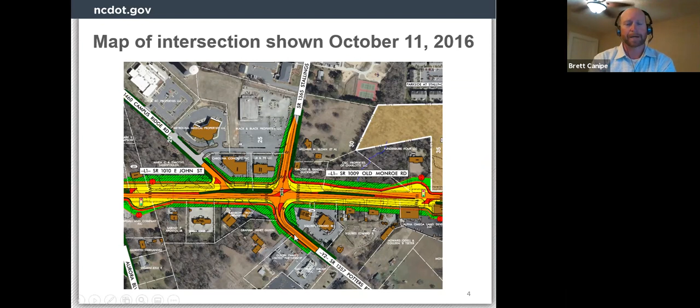This is a public hearing map, a depiction of what we originally proposed. This is the reduced conflict design. This is Potter Road that turns into Stallings Road, south to north on the screen, and west to east on Old Monroe Road in this direction. This design would allow left turns off of Old Monroe, but not left turns off of Stallings or Potter. The reason we'd do something like that is it increases the operational efficiency, and it's actually safer as well. However, we knew the town wasn't completely keen on that.

We've always been in this collaborative mode with the town, and we knew you wanted us to look at some other options. So we did. We looked at what it would look like to put a full movement, traditional intersection at Stallings Potter. That was at the town's request, but that was a good request, right? If it would work, why wouldn't we do that if that's what the town wanted? So we did take a look at that.

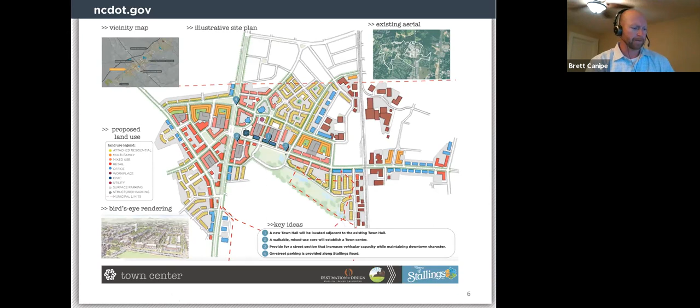We're aware the town has a desire to make this a downtown center, and part of that would include a multi-way boulevard feel with narrower lanes, landscape medians, and we could still talk about what we can do to beautify things out here even after this project's underway. This was a sketch the town provided depicting what this downtown center might look like, at a high planning level. We used this to come up with a few other options for us to think through.

We looked at that full movement intersection, and we've known this for quite some time and been pretty open about it. The full movement intersection doesn't give us the level of service we'd expect to deliver in that future year. We design projects to handle a future year of traffic, not today's traffic. That makes sense because it's a large investment of public funds, and we want to be good stewards of those funds. So operationally, we know the traditional intersection wouldn't work.

As an alternative, we looked at what's known as a quadrant roadway. The quadrant roadway could potentially work better to fit into this downtown center, because it influences the trips taken around the perimeter of an intersection. It doesn't seem as counterintuitive at first to some folks when they first look at it, although it'll take some getting used to. I'll show you a quick video that describes this better.

What we figured out was that the RCI, the original design shown on the public hearing map, actually worked the best. Just from a pure engineering perspective, level of service, we think the RCI was the best, but the quadrant performed okay—it was going to do the job. It wasn't quite as good, but it's somewhat splitting of hairs. We knew that one of those two designs is what it would take to handle that future year traffic volume.

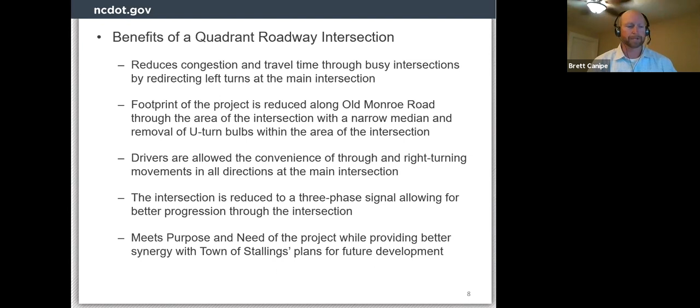Our thoughts are that this design we're going to go through here in a second is going to meet the purpose and need of the project, which we're bound to do, to serve the public. We believe it will match better with the town's future development. That's something Alex and I have talked about a number of times, just in general, the vision for the town. So it's a goal we share mutually, and we want to help the town achieve that if we can.

So these are just some quick definitions. Essentially, it's a way of redistributing the left turn by only making right turns. You would drive through an intersection, make a right, and you're going back the way you wanted to go, which would have been left if you turned left.

A lot of this information can be found if y'all are bored and want to do some quick research. There's certainly federal level guidance that tells us these types of intersections are the right choices to make in growing urbanized areas because of their functionality and their safety. So it's not a completely foreign concept.

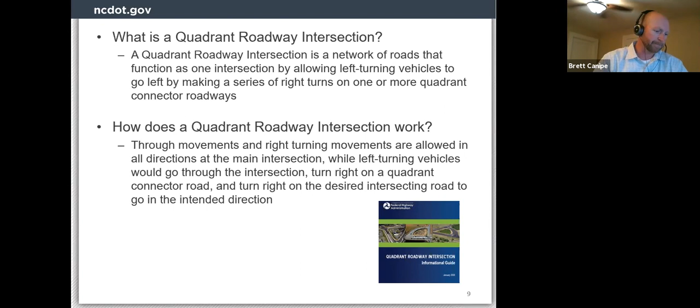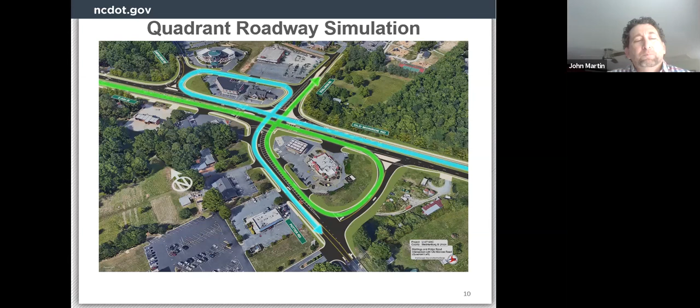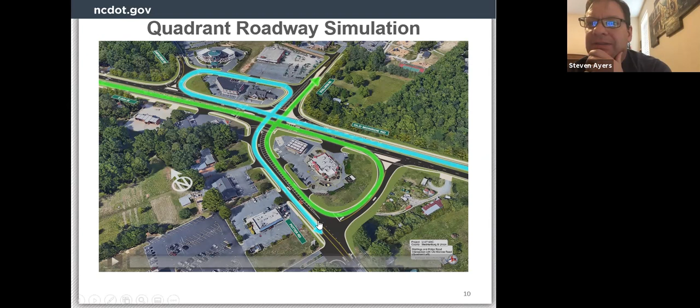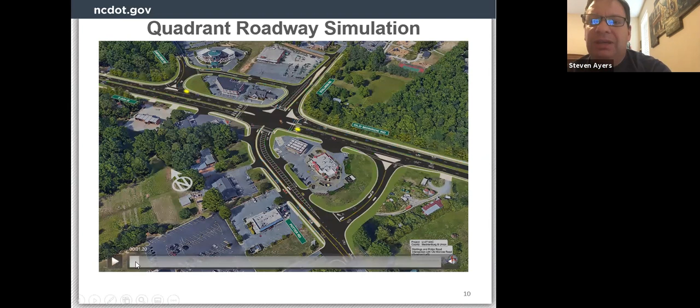I have one question on this one here, and it's still the same question I had the last time you came here. On the light blue side there's two lanes coming off of Potter Road. On the green side it's just a single lane going through the intersection. So my concern is, is there going to be any study to validate that you're not going to get traffic backing up there trying to turn right onto Monroe Road going towards Charlotte, with people trying to cut across those folks trying to get into the go-straight lane, across the lane for Potter. So you see what I'm trying to say?

Yeah. So the lane that you've got your cursor on right now that goes straight through, if it's backed up, then you're gonna have people starting to back up where your turn is coming in off the roundabout. And then also you're gonna have conflict, it seems like, of people trying to cross in front of them to get over into the turn lane.

And today, when it's rather busy, that straight through lane you currently have now easily backs up all the way past the park on the opposite side. So I guess I'm a little concerned, based on the traffic patterns I see currently, that would be a sticky point causing some grief with a lot of folks, because you'd have very little room there to basically crisscross traffic from one lane to the other.

Sure, and good questions. What I'll say to that is that the signal timing itself works in favor of the intersection.

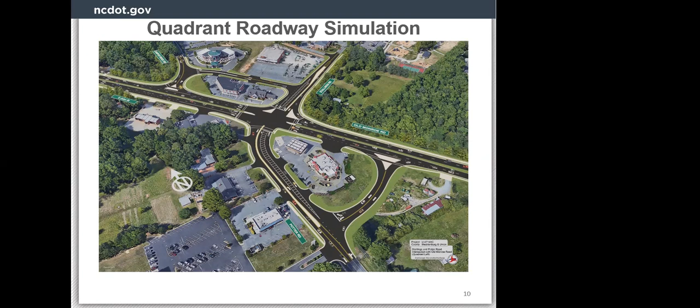I apologize, I didn't do introductions to the rest of the team, but that was Mike Reese. He is the Western Region Congestion Management Engineer for North Carolina DOT, and he is most definitely our expert when it comes to preparing for, designing, and coming up with these types of treatments. Thank you, Mike, for that detail.

I'm not sure where the 200 feet falls, but I'm assuming it's got to be up in there somewhere. The point is that queue of traffic today is much, much longer than 200 feet. So in the design year, we're stacking cars up 200 feet and then they're flushing, the intersection flushes through. That's the beauty of this design. It's just that much more efficient, which is exactly why we're proposing it.

And again, with the other benefits, the more narrow cross section, less cost, that's less lanes for pedestrians to cross. That alone is a big win for a place trying to become a downtown center, right? It's always a goal to reduce that pedestrian-vehicle conflict. So there's a lot of good attributes to this type of design. Thank you for that information, Mike, and thanks for answering the question.

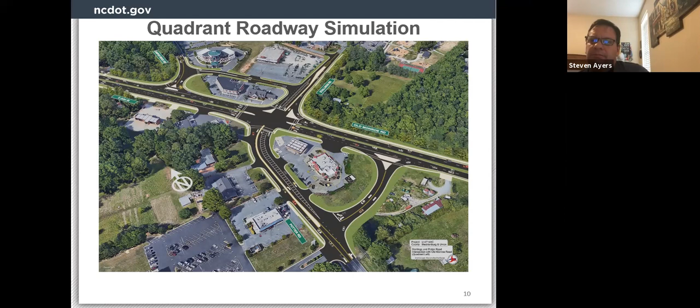So this is some of those other benefits I was already getting into. We're convinced it's the right solution here because it's a balance of the town's desires and what's needed to meet the demands of the roadway. We've been able to incorporate some of the other comments from the town into this design. Reducing that median width, like I talked about, is going to save us money and be better for the downtown feel.

Certainly, we can talk about landscaping, how we can weave that into the project. You can have plantings and certain things, obviously you wouldn't want to do something that would impede sight distance or create a safety concern. But otherwise, I'm sure there would be opportunity to enhance the median. We've brought our lane widths down to 11 feet where we can on the side streets, and those channelization islands dividing lanes of traffic will create enhanced pedestrian safety.

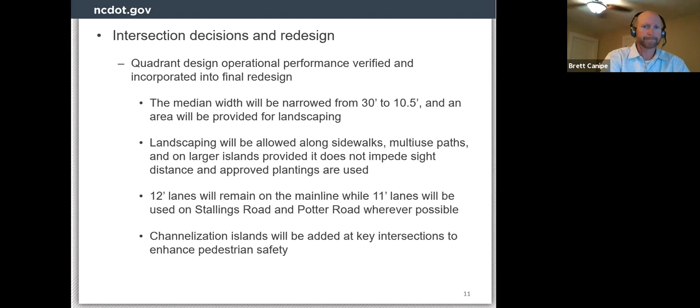So where we are with the project right now, it's rolling into, or we've been in the right-of-way phase, and we've kicked that back off very recently. What we need to do is complete the final design on this quadrant intersection design, incorporate that into our plan set, and start getting the right-of-way here, just as we are for the rest of the corridor. One thing we've got to do with all projects is get the right-of-way and get the utilities out of the way before we start construction for the most part.

It takes a good bit of time to do something like this on a project of this size, so the June 2024 construction schedule is probably an appropriate timeframe given the magnitude of what we're talking about. There are around 200 parcels on this B section of the project alone, and I don't know that I could quantify the utility relocation, but it is substantial for sure. So that's where we stand, and that's where we need to go next.

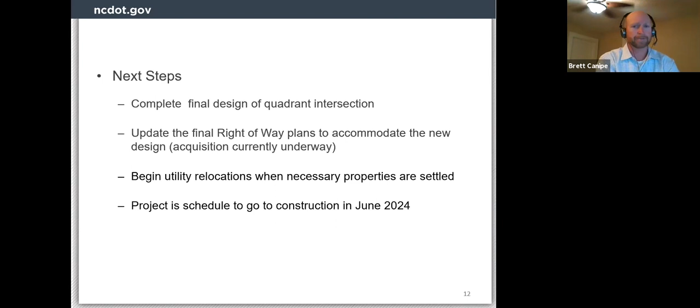Here we are back at that screenshot. We can talk a little more about it if you want, and certainly want to open up the floor for questions or comments. If anything, guys on our DOT team that's also on the call — I know we've got our planning engineer Stuart Basham, the project manager Brian Key, and Mike Reese was on the phone — so we've got a team of experts. If there's anything else you all feel we need to cover, we want to do that tonight, because ultimately we'd like to move forward from here, to get to work designing this with engineered plans, and move forward to right-of-way and utility relocation.

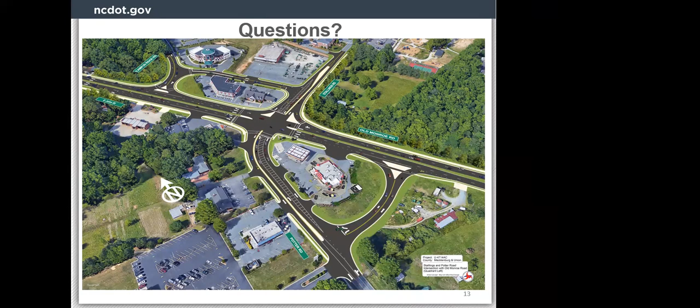Can we do that offline? This is an informational session for the Stallings Town Council, that's the priority. So Ms. Covington, if you could take that offline and call Brett after the meeting, because we have a hard stop with a 7 o'clock council meeting, so we need to get through this. Thank you, I'd be happy to do that. Thank you, Mayor. Thank you, ma'am. Thank you.

Okay, so I believe we wanted to transition to talking about the Stallings, or rather Potter Pleasant Plains project, right? Yes, sir. Okay, so maybe I should do a quick rundown of what that project is.

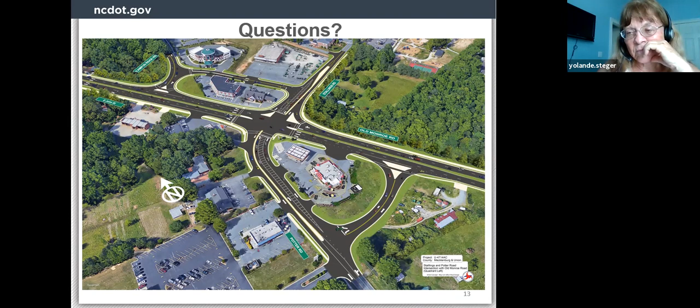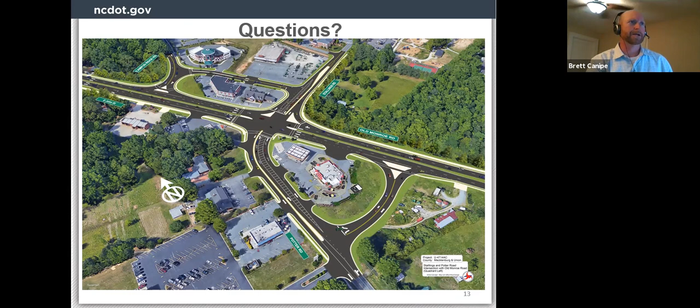I thought I had a set of plans for this project in my inbox, but there are plans to improve... let's see if I can. I'm going to unshare that and share my screen. Help me a little bit with the other screen here, bear with me, I apologize guys. Where am I at? So I said I was getting better at these things, right? Really. Oh, here's the button.

Just so we can orient ourselves, everyone can see, and probably already knows, just how close we are to the Potter/Stallings Old Monroe Road here at Pleasant Plains and Potter. There's been a project the town has been leading the charge on for quite some time, I think since the 2013 timeframe, to improve this intersection by adding left turn lanes, possibly some right turns, but definitely the left turns at Potter and Pleasant Plains.

Like many of our projects, this project has seen its fair share of cost increases. There was a baseline cost estimate done, and what's happened over the years is the project's been refined, and really digging in you realize what it takes to make these improvements. It's turned into a very expensive project, funded through what's known as a discretionary fund out of the CRTPO. Those monies are federal funds that come first through NCDOT and then are given to the planning organization to use at their discretion. In order to access those federal funds, they come with a minimum 20% local match.

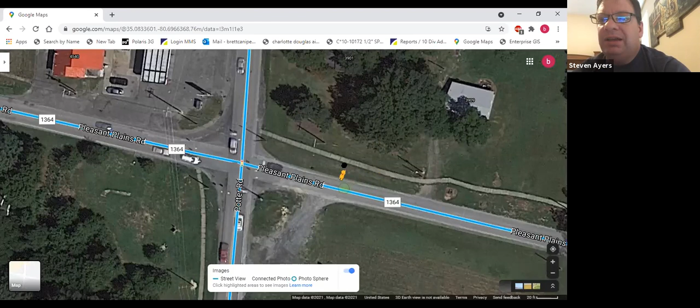So the sides of the road are falling off. Oh, yes, in certain sections where the white line should be painted, the road doesn't even exist there. So I guess my question is, what are you thinking about as far as the actual fixing of this road?

Yeah, that's a good question, and a hard one, because here's why. If this thing gets looped into the larger Monroe Road project, for instance, and it's 2024 before it's implemented, that's a long time to have these conditions.

And we recognize that. I just had a few minutes to talk with my division maintenance engineer, Lee Ainsworth, who was formerly in the district office there, and this was one of his counties he was responsible for, so he's intimately familiar with it. Everybody on our side knows that something needs to be done. The question is what, right?

So if the project moves forward with its current funding mode and doesn't get incorporated into Old Monroe, it could be done sooner. I don't think NCDOT needs to go out and spend several $100,000 resurfacing the whole thing, because again, we have very limited funds.

Your own pictures here are painting- I mean, I just don't see that this road could last. If you're talking about not starting until 2024, I'm not sure this road can last that long. You've got ditches out there that are starting to collapse, 18 inches deep.